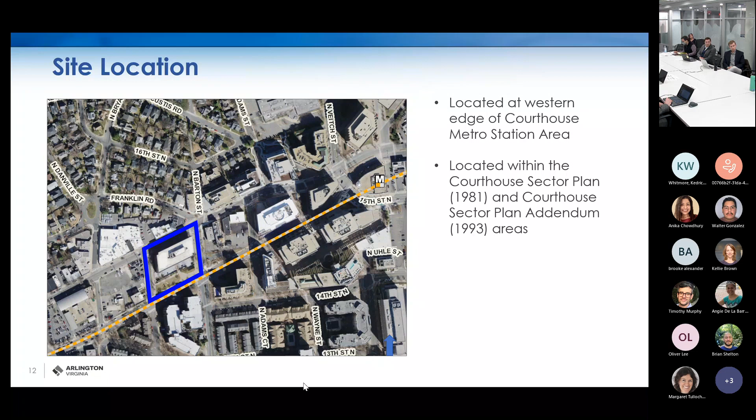In terms of the site location, you can see the site here outlined in blue. It is located in the Rosslyn-Ballston corridor within the Courthouse Metro Station area. The block is bounded by Wilson Boulevard to the north, Clarendon Boulevard to the south, North Barton Street to the east, and North Cleveland Street to the west. The block comprises approximately 1.42 acres and is currently occupied by a 5-story office building. The block is bordered by low-scale retail to the north, residential development to the south, retail parking and a temporary public space to the east, and the Courthouse West General Land Use Plan study, just concluded, to the west.

To the north along Wilson Boulevard is service commercial development bordering the Lyon Village neighborhood. To the south is high residential. The east is high medium mixed use. And to the west is currently service commercial, although the county board authorized the advertisement of medium office apartment hotel for this site in September of 2022.

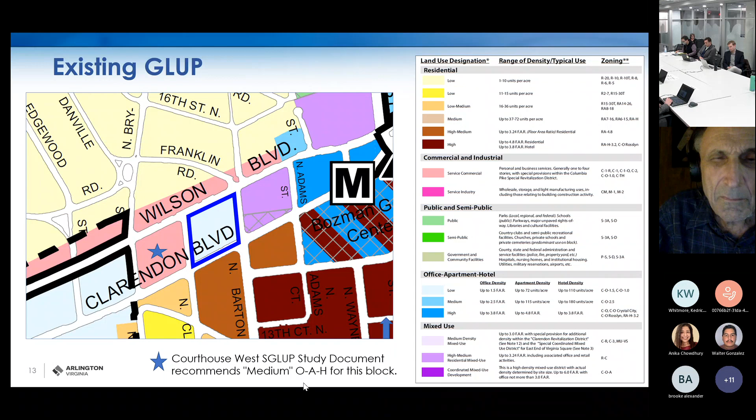The subject block is currently zoned CO 1.5, which corresponds to the current low office apartment hotel GLUP category. The properties to the north are designated C2, keeping with their service commercial GLUP designation. Properties to the south are designated RA 4.8. The properties to the east and west are designated C2, although, coming out of the Courthouse West Special GLUP study, the property to the west is recommended for CO 2.5.

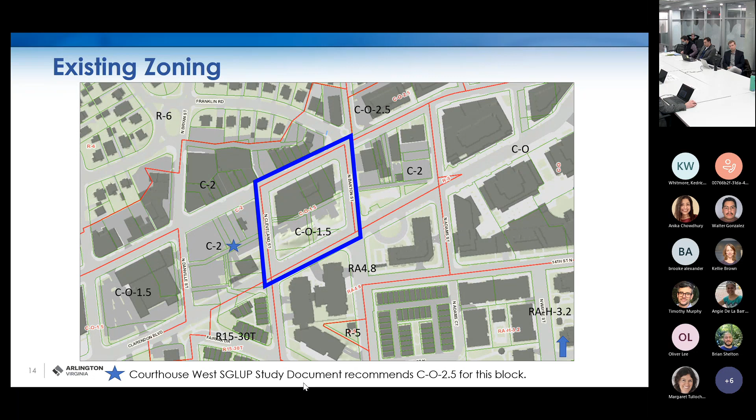The application submitted to amend the General Land Use Plan is from low office apartment hotel to one of two different categories. One of those categories is high office apartment hotel, which corresponds with the CO mixed use district. CO allows for up to 3.8 FAR for office use, up to 4.8 FAR for residential, and 3.8 FAR for hotel, with heights from 153 to 180 feet depending on the use.

The other General Land Use Plan category requested is medium office apartment hotel, which corresponds with CO 2.5. CO 2.5 allows for up to 2.5 FAR for office development—FAR stands for floor area ratio—up to 115 units per acre for residential development, and up to 180 units per acre for hotel development. Heights range from 12 to 16 stories depending on the use.

The applicant is requesting the GLUP amendment to high office apartment hotel or medium office apartment hotel because the 1993 Courthouse Sector Plan addendum calls for higher density commercial residential mixed use, but does not specify a specific GLUP or zoning category. This would allow the applicant to develop up to 16 stories if we were to go under CO 2.5.

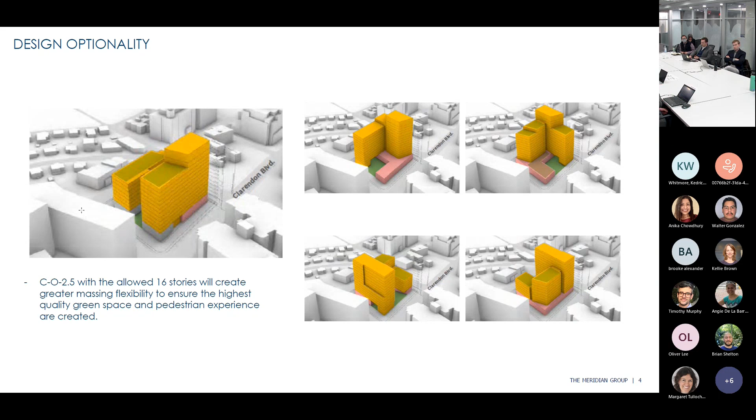Again, from a location standpoint, it's a short walk to the metro in both directions. Being in Courthouse, we showed its proximity to the metro, under a 5-minute walk to the actual metro entrance, and much higher density designations than the CO 2.5 that we ultimately think is appropriate here.

So that's all I have prepared. Just wanted to hit on a few items we were thinking of. We welcome questions later during the discussion and are happy to answer and address any concerns. Thank you very much. Staff, anything further to add? Yes.

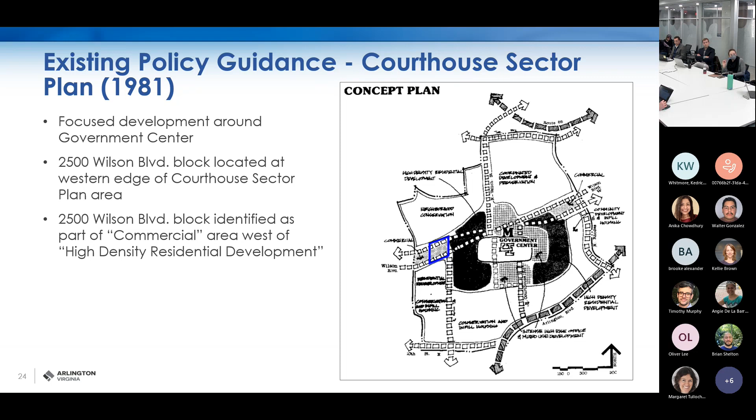In 1984, the county board approved a GLUP amendment rezoning and site plan for the 2500 Wilson Boulevard block. The GLUP amendment changed the designation to low office apartment hotel. The site plan resulted in the 5-story office building that exists on the block today.

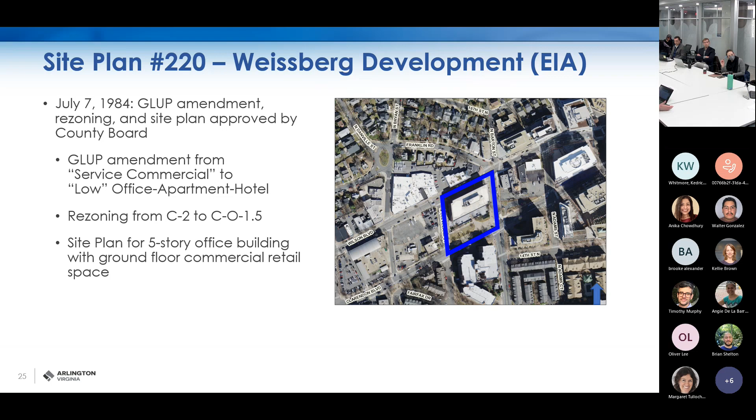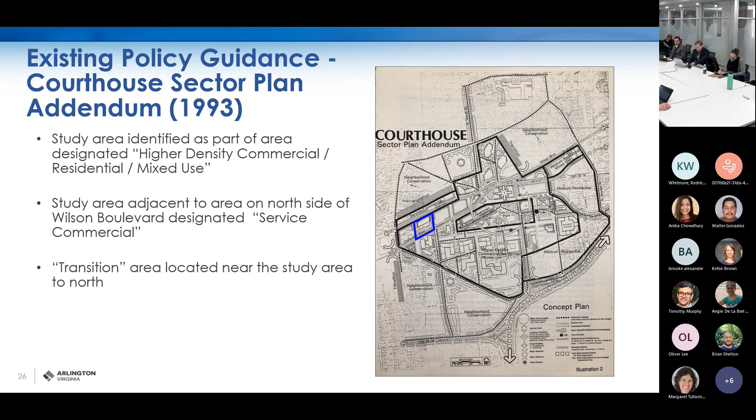This development precedes the adoption of the courthouse sector plan addendum, which was adopted in 1993, 12 years after the courthouse sector plan. The addendum provided updated planning guidance for this block and identified the location within a larger area designated for higher density commercial residential mixed use development. The addendum includes little explanatory text regarding this designation and did not recommend or identify a specific GLUP amendment or designation that would fit within that higher density commercial residential mixed use classification.

It's important to note that the block is adjacent to an area identified for service commercial development on the north side of Wilson Boulevard, and then further north a transition area.

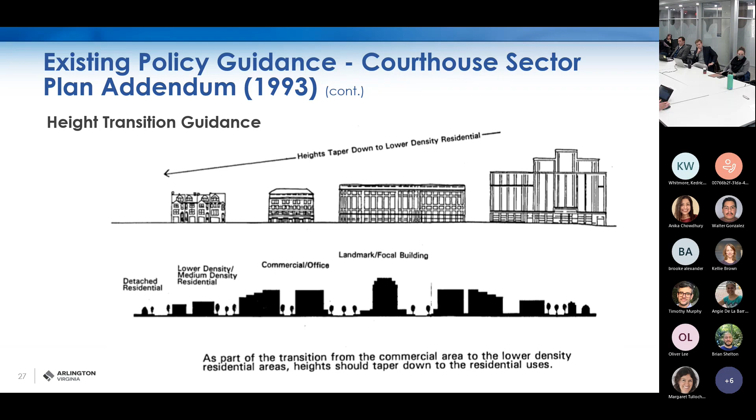The addendum also contains general urban design guidance about building height transitions within the courthouse area, signaling that heights should taper down from the core area to the lower density residential areas.

We also note that there's a Clarendon Courthouse neighborhood plan that was last updated in 2007. It's important to note that neighborhood plans are prepared by community members and developed to capture the community members' vision and ideas and to recommend potential improvements.

More recently, the Courthouse West Special GLUP study concluded in September 2022 and developed guiding principles and recommendations to guide future development of the block immediately to the west of the 2500 Wilson Boulevard block.

The study document, adopted by the county board, recommended a GLUP designation of medium office apartment hotel, as Margaret has noted, and includes guidance for maximum building heights of up to 14 stories in the center of the block, tapering down to 4 to 6 stories at the edges. 4 stories identified for Wilson Boulevard and Clarendon Boulevard frontages, and for the massing adjacent to a planned public space on the block.

The study document contains recommendations that envision a new public space, as well as affordable housing and transportation improvements, among others, to improve access and safety. The study document notes that medium office apartment hotel could serve as a starting point for a future study or development review process for the 2500 Wilson Boulevard block.

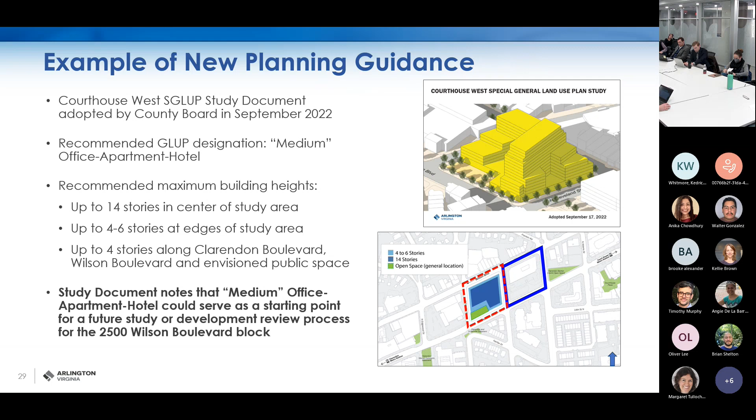You can find that on the north side of Wilson Boulevard. More recent development consists of taller developments.

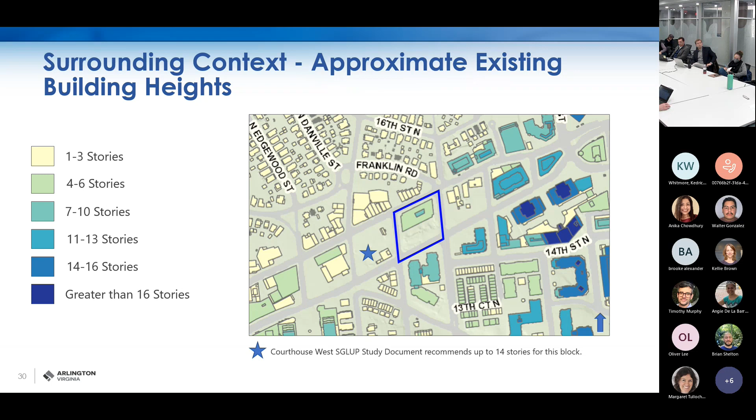The 2500 Wilson Boulevard block and other areas to the east toward Courthouse Metro Station fall within the boundaries of the courthouse sector plan and plan addendum. These documents do not provide detailed planning or detailed building height guidance.

We see heights of up to 180 feet closer to the station. And just to reiterate, the Courthouse West study resulted in building height guidance of up to 14 stories for the block to the west of the 2500.

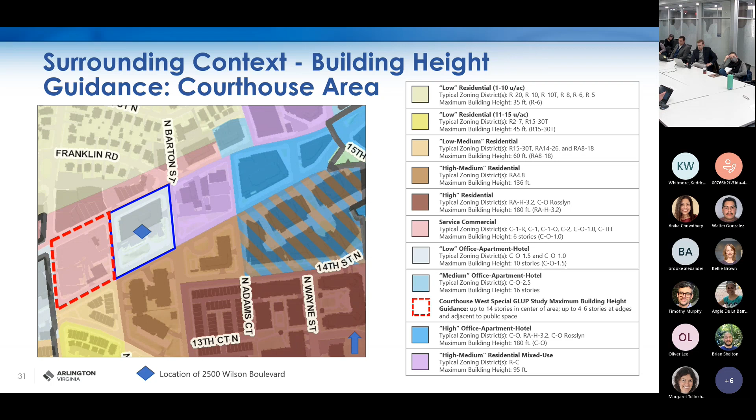Now I'll pass it back to Margaret to conclude the presentation.

In terms of our staff analysis, looking back at those questions for discussion we already identified: in terms of support for county goals, as we saw, the general land use plan calls for high density development along our metro corridors. In addition, our affordable housing master plan recognizes the need for additional housing as well as additional affordable housing. In terms of existing planning guidance, the courthouse sector plan and the courthouse sector plan addendum provide some limited guidance.

The addendum calls for higher density commercial residential mixed use without a specific LRPC zoning category associated with that. In terms of the most recent guidance, as Tim mentioned, we have the 2022 Courthouse West Special GLUP study document, which provides various recommendations, including noting that medium office apartment hotel is a potential starting point for this subject site.

And that adjacent site, as we saw for the Courthouse West, allows for building heights up to that level. And again, there are no relevant ongoing planning processes at this moment, and there's no PDSP associated.

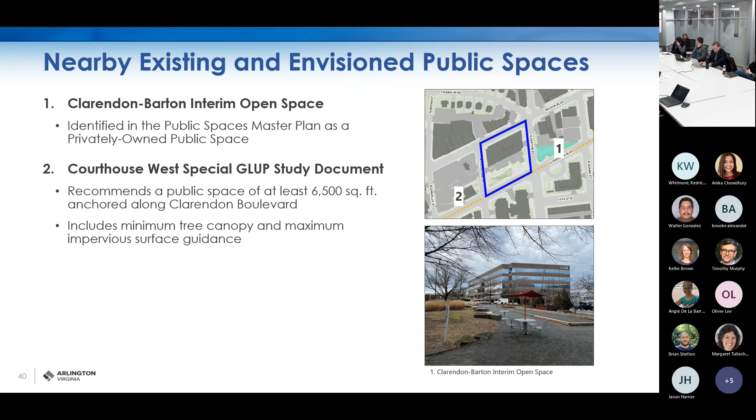I'd like to thank you for that. And not to make more work for you, but in a perfect world, we would ask you to look at how your planned open space would fit with the rest of the community. Can you have a little path that connects to another park? Because there really is not enough open space per resident based on our own adopted public spaces master plan. So while that sounds like an extra step, it behooves everyone in the long run, makes your building competitive and much more fun.

I'll just quickly say, we agree. It's an advantage to have connectivity to the adjacent green spaces, so there's not really a disadvantage to that. And you will have lots of help in the community - it's going to be the healthiest block.

Commissioner Sarli: I'm going a little bit in a different direction, though this conversation brings up a bit of it - probably echoing Commissioner Schroll more than anything - but I'm struggling a little with this site relative to Courthouse West, this notion of a special GLUP. At some point it becomes so many independent points that it's hard to anchor this on a greater context. I think Courthouse West was fine as a process, but it was a special process, and now right next to it we're having another special process. So at what point do we touch back to base and say, okay, here's the plan we're all springing off of?

So I'm having a little bit of a hard time engaging in the conversation because of that. It's like trying to reference back to a larger plan. And that's why I particularly like proposal 2, because of that larger context and how this fits into the whole.